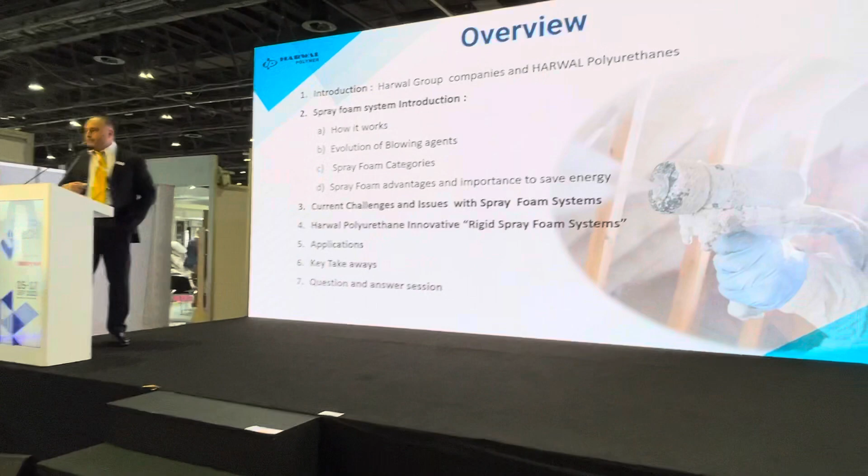Let's dive into our presentation. First, I want to give you a brief overview of the flow. We will start with the introduction, then go into spray foam, how it works, the different categories, advantages, disadvantages. I'm assuming some of you are not aware of how spray foam works, so I'm treating the audience as both knowledgeable and new to this.

Once I give you the overview, I'm going to talk about the challenges of spray foam. Even this morning I got phone calls about some challenges you are facing. Spray foam is a sensitive product, so we should be careful how we apply and use it.

Afterwards I'm going to talk about the spray foam systems that we currently have available, and we'll conclude with applications and takeaways, followed by the question session.

Just a brief introduction. Our division is part of the Harwal Group. We are a global company, not a local company, present all over the world. We are the biggest plastic converters in the GCC region, 200,000 tons. IP Harwal is one of the divisions, competing in both plastic and polyurethane.

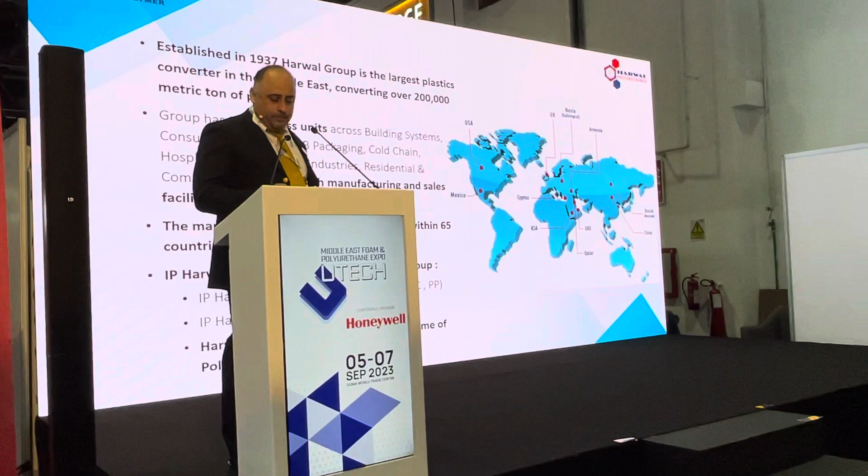Right now we are basically in the polyurethane division, and it's a worldwide division. It's one of the oldest companies in the group, and also in this part of the world. We have a diversified product range, and today we are going to talk about spray foam, which is part of the building products.

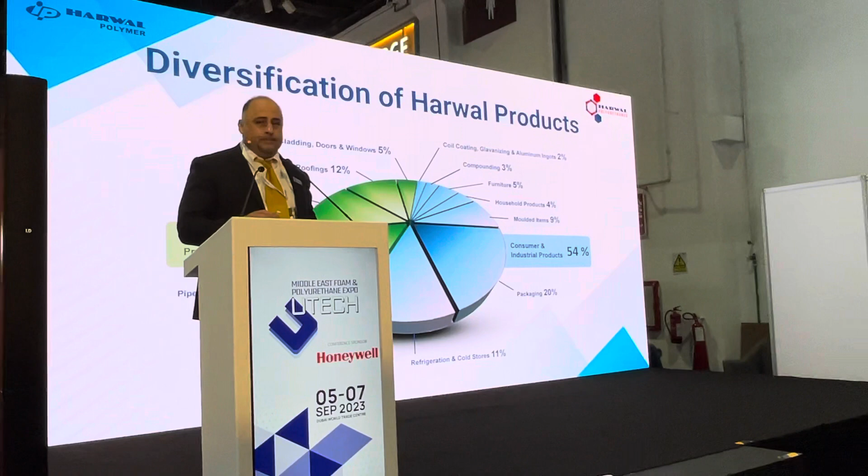Innovation is our culture, it's also in our DNA I would say. We have a group of people, day and night, thinking about how to innovate. Our chairman, Mr. Harwal, drives all these innovations from A to Z, and that's why we started working in polyurethane from 2012 onwards.

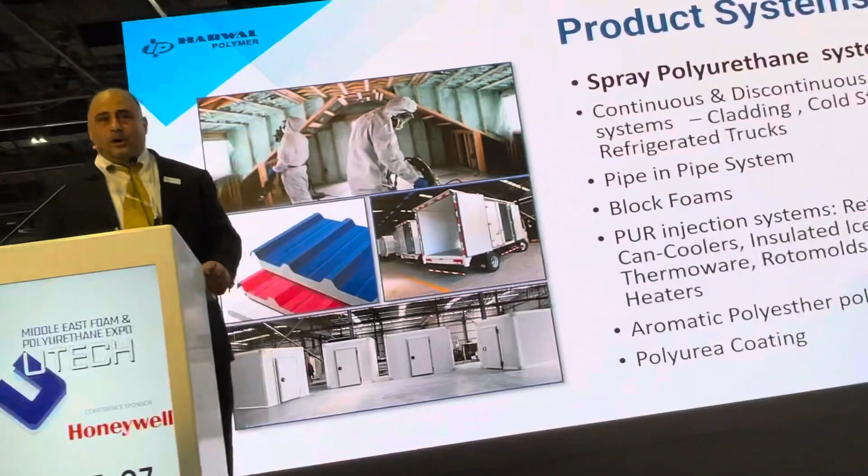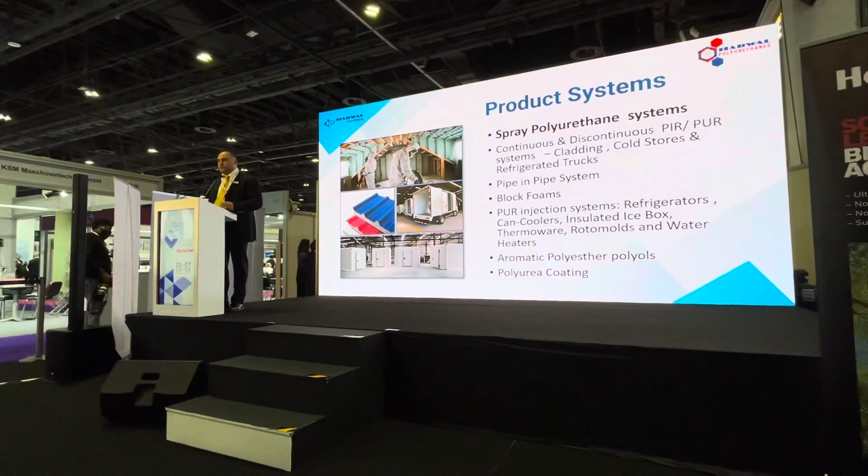Our product systems, as you see, cover a wide category. Today our focus is on spray foam. We cater to all other rigid foam applications - trucks, cold stores, continuous lamination - and spray foam is one of our good products that we are currently capturing in the market.

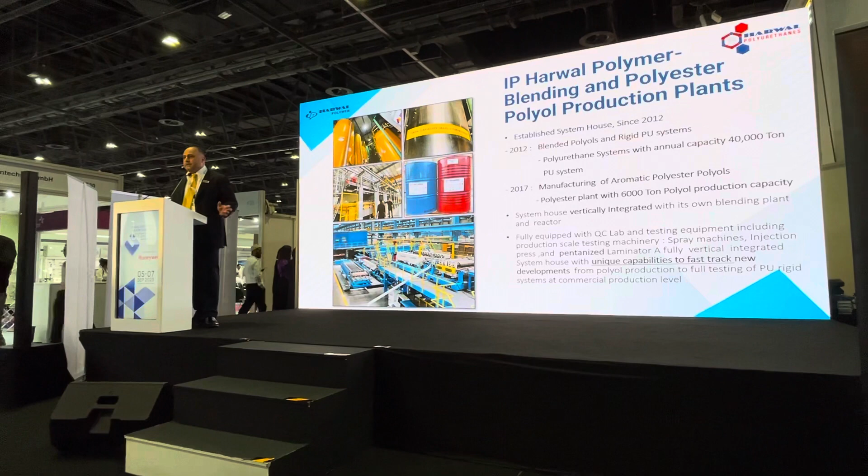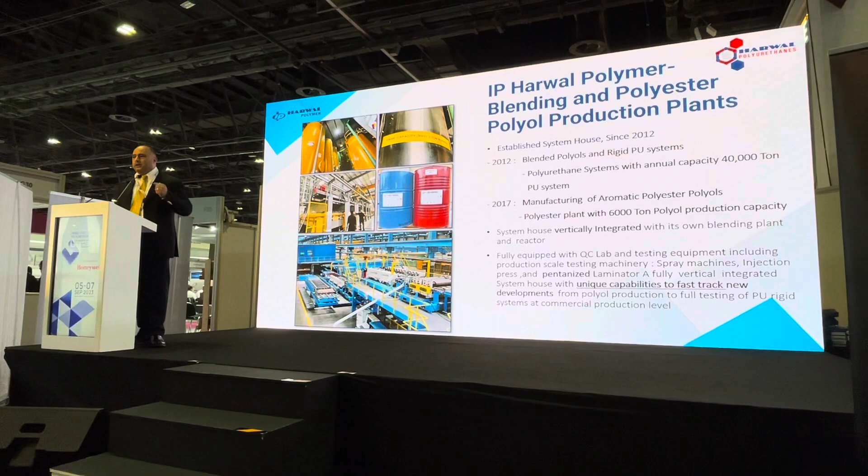This shows our capacities at our factory, located in Dubai Investment Park. One key feature is that whatever we develop, we immediately roll out and test in our own facility. We have our own laminators, presses, and machines, so we don't use our customers for our developments - we are our own customer before we give the product to outside customers.

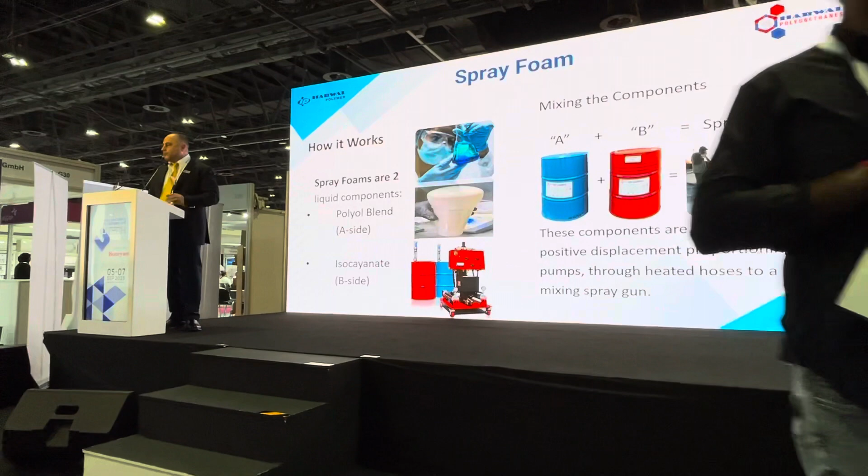So basically, what is spray foam? Spray foam is two components - the blended polyol and the MDI. You mix them together with a positive displacement pump machine, the spray machine, and then you spray it.

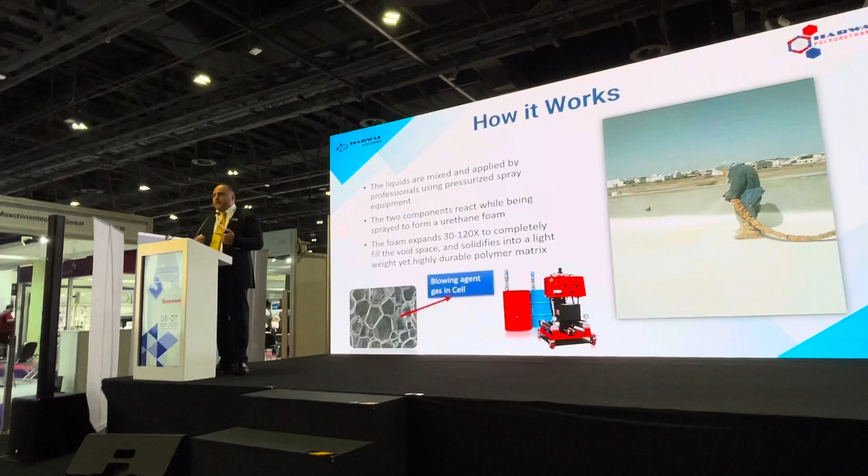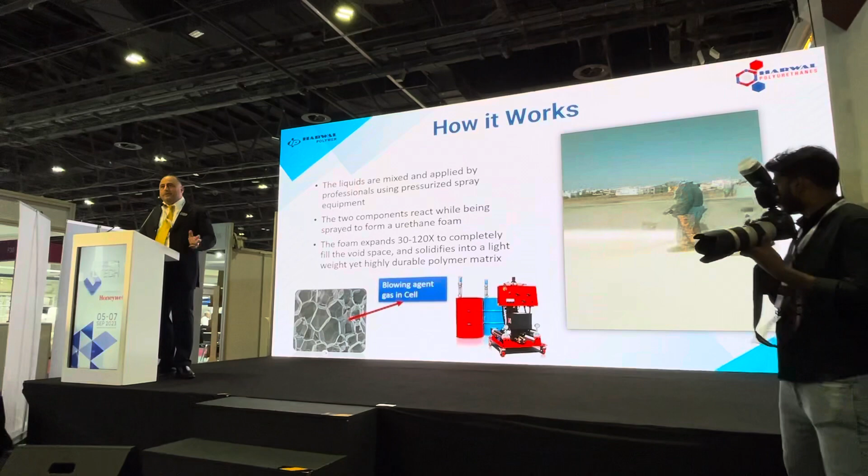How it works - the liquids come and react in the mixing head. I want to show you a video here from one of our sites in Ras Al Khaimah. This is our spray foam, taken in hot temperature about 2-3 weeks ago. We are basically spraying one of our customers' roofs.

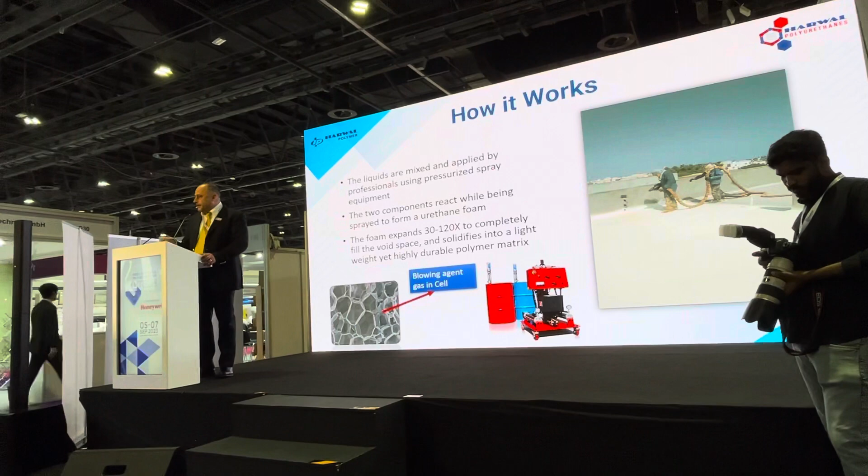Important is the blowing agent, which is the gas in the cell. This has a critical impact on the insulation value of our spray foam. Depending on the gas we are using, you will achieve different insulation values, which will come later in our presentation to see the impact on different spray foam systems.

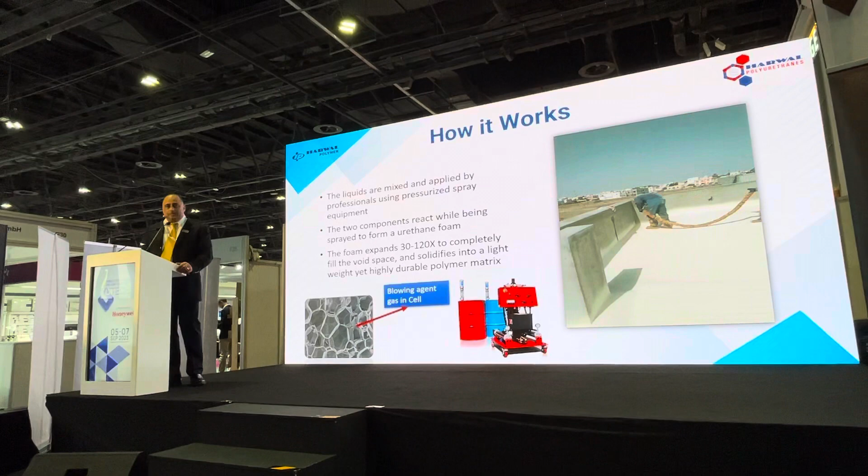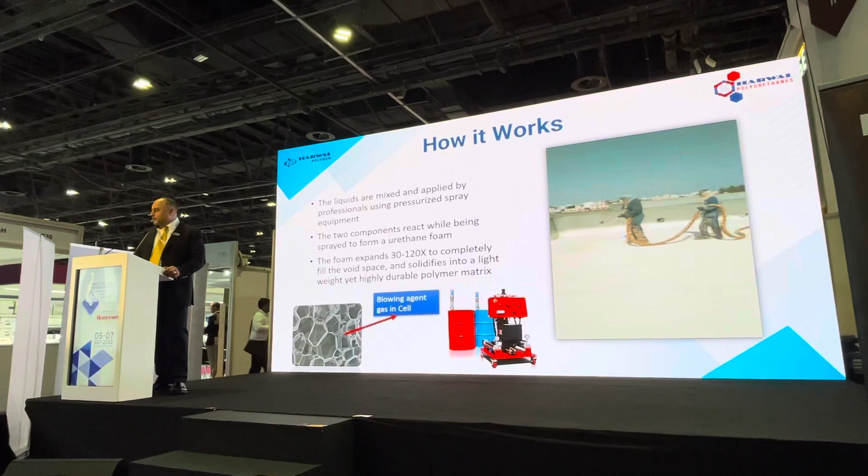As you see, the guys are doing some touch-ups on the corners in hot Dubai conditions of 40-45 degrees outside, and you can see a nice smooth surface, which is our premium product - spray rigid foams.

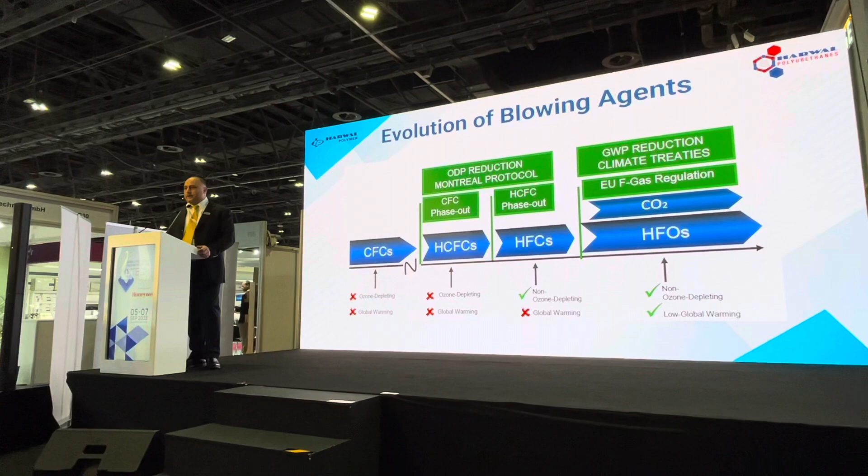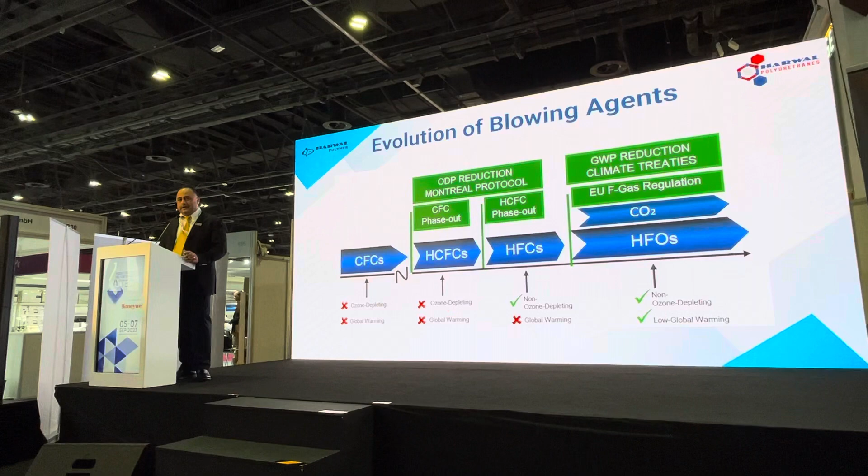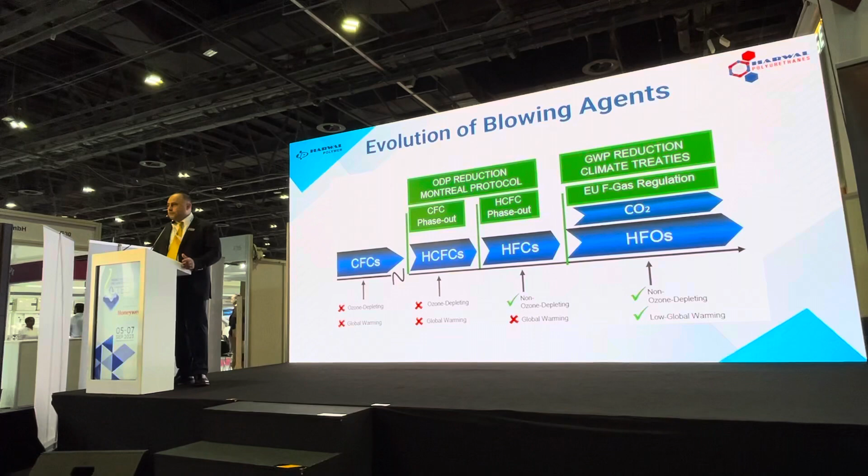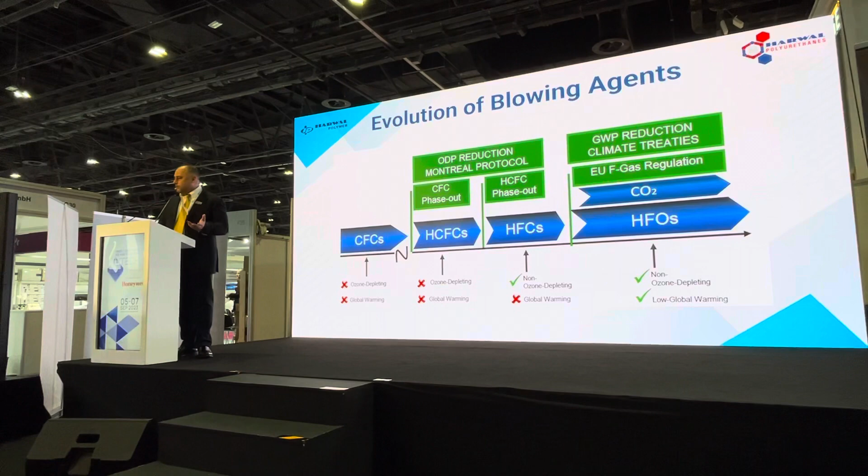As I mentioned about the gas that was important in spray insulation, it started with CFC, and it's going down from left to right. Right now we are phasing out HFCs, and now we're at the last stage where we have HFOs and CO2 coming from water. This is the latest stage of our evolution of using blowing agents in spray foam, and each one has distinct criteria. At the far end of the graph, it is ozone friendly and has low global warming potential. This is what we are striving for.

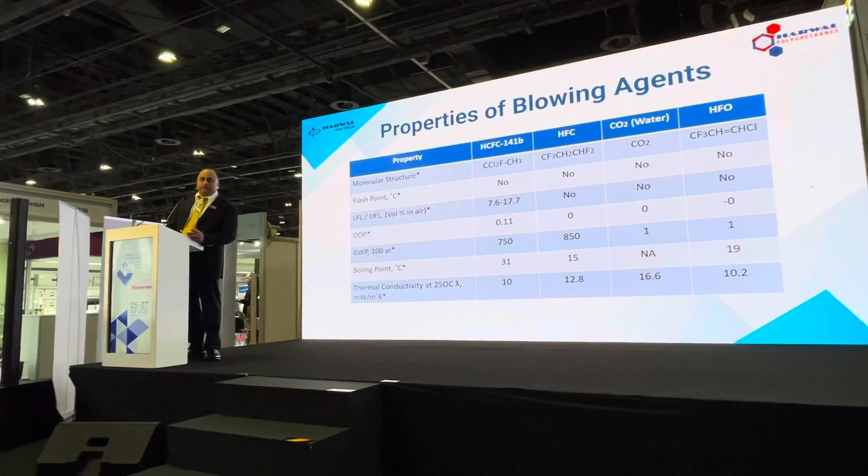The properties of the blowing agents - what's important here is the boiling point. If you go from left to right, the HFOs have a low boiling point, 19 degrees. The 141b system has a 31 degree boiling point. This is a challenge sometimes when we're applying spray foam in this part of the region, where temperatures can soar all the way to 50 degrees. So one point is the boiling point.

The second point is thermal insulation. As you see, the water-blown system has a lambda of 16.6, which is the highest, which works against what we want. We want low insulation lambda, but when we go to water, that's where we get penalized on the insulation value.

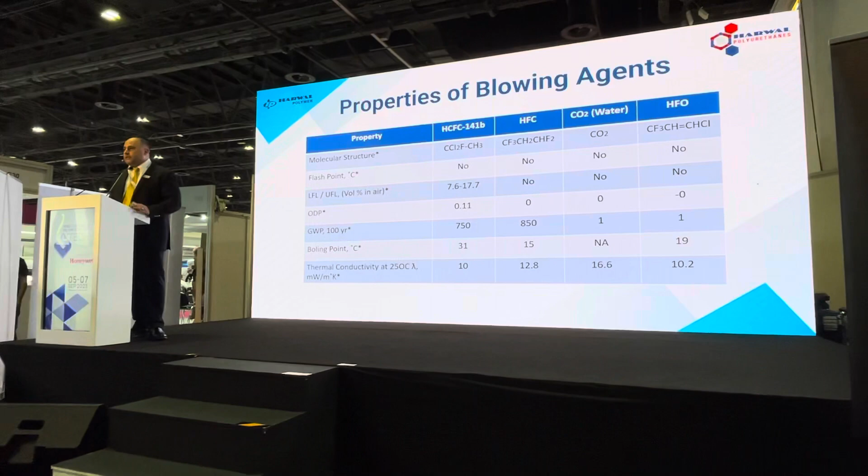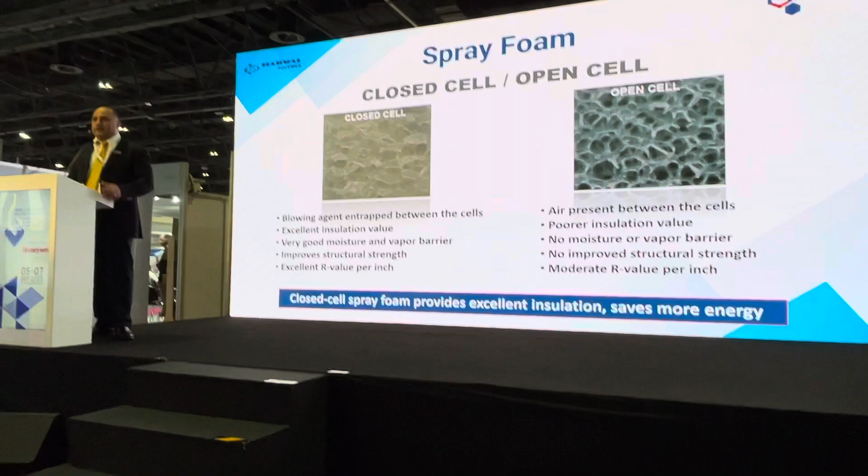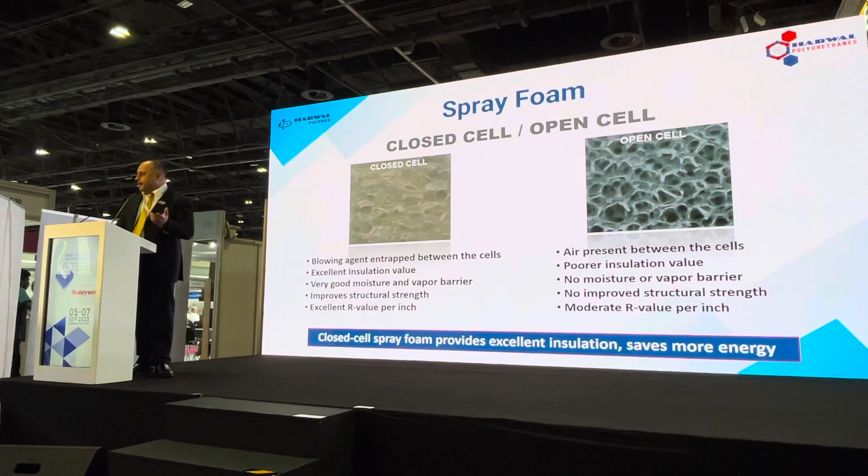We have two categories of spray foam: closed cell and open cell. An example to keep in mind: one is gold and one is silver. Silver is the brother of gold, but silver is much cheaper. The gold is the closed cell because it is strong, it's closed cell, it has a very good thermal barrier, structural strength, and the insulation value is much better than open cell. The open cell has similar properties but is weaker, though it has some distinct applications where we can use it.

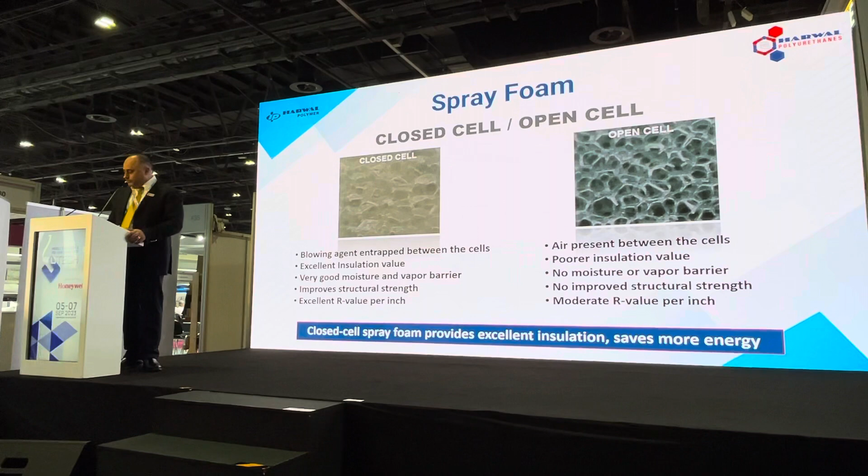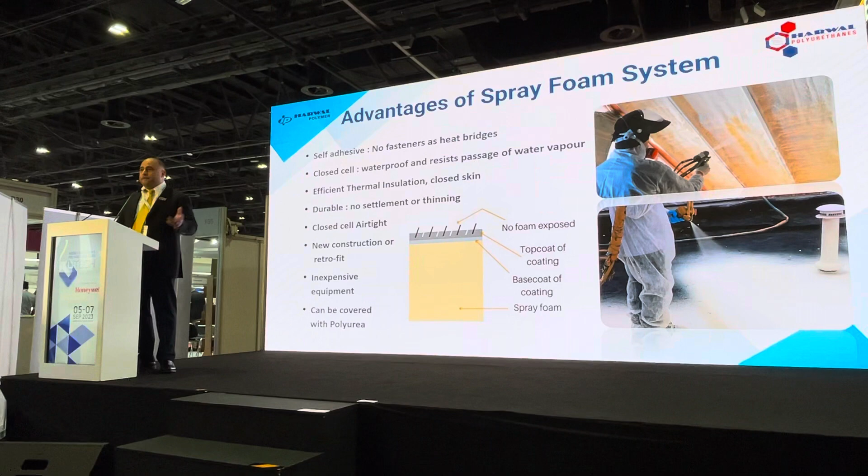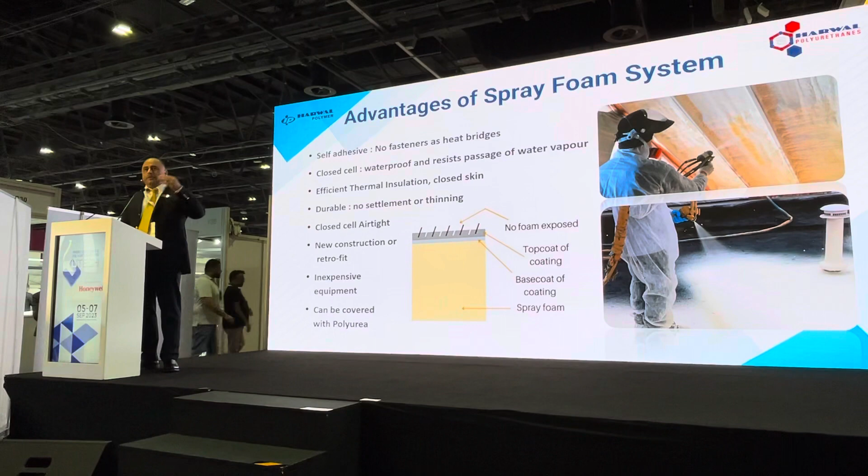What are the advantages? There are a lot of advantages. You don't need to apply glue on the wall to apply your spray foam - you just spray it, boom, it glues on. It prevents moisture penetration, it's a good insulation value, and it reduces the load inside your office or room. If you're properly insulated, you don't need to put a lot of AC, so your AC costs go down. You can multi-layer it, apply polyurea over it, put protective coating over it, and it can act as a permanent insulation barrier. So it has a lot of good advantages.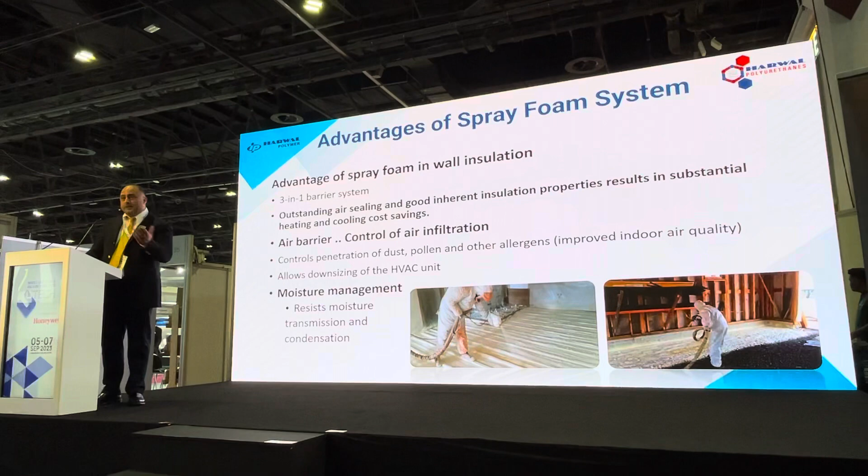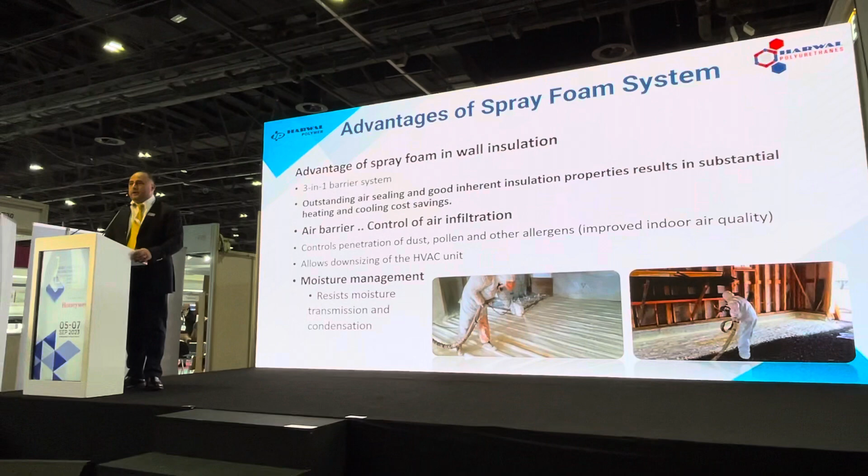It's an air barrier, it prevents moisture penetration, and it seals the whole area 100%. This is very important, especially in North America, where power is very expensive, so everybody is trying to reduce their energy costs - not like here, but elsewhere it's very critical.

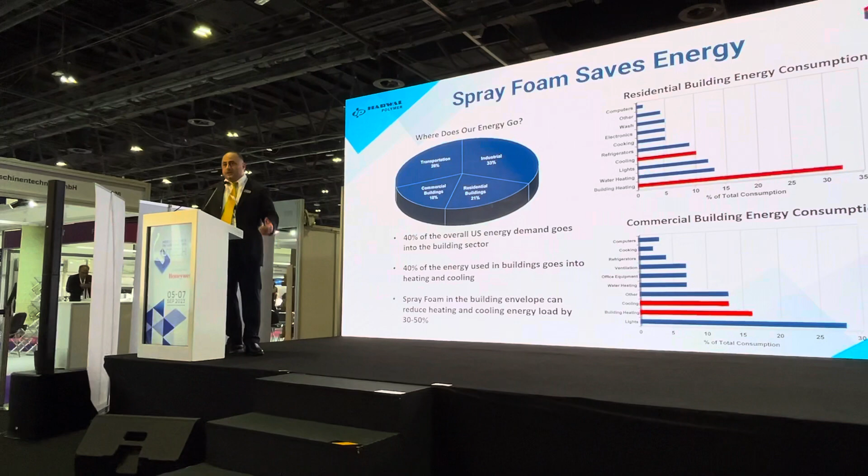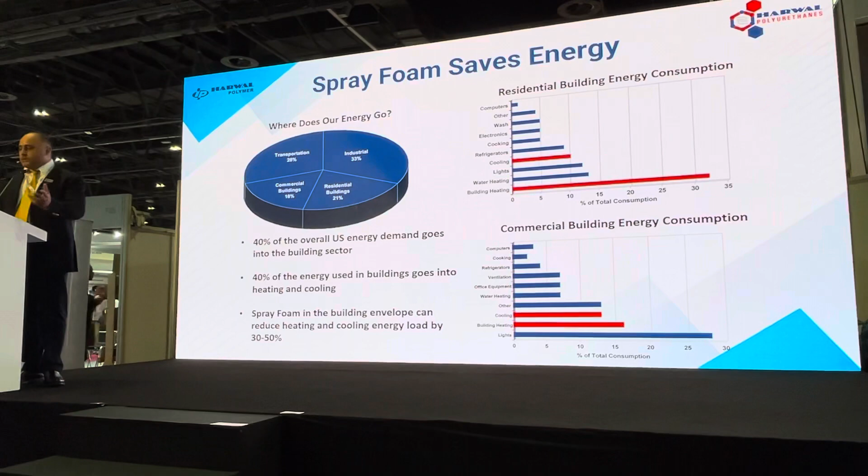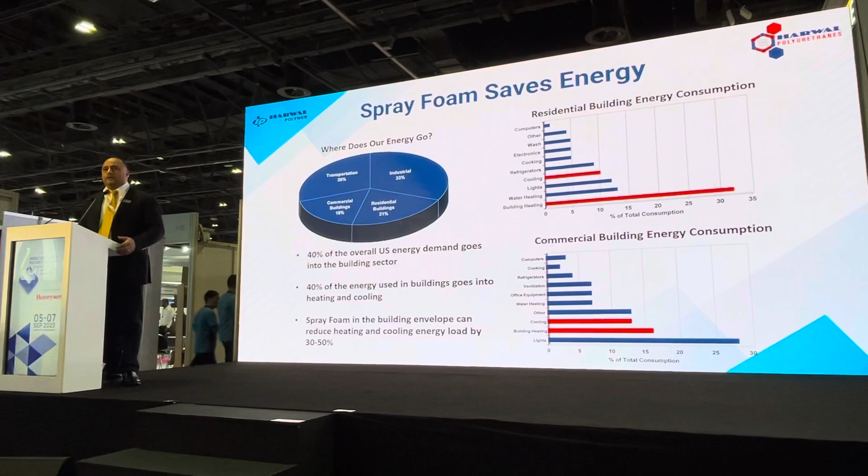Spray foam saves energy, as I mentioned. In the US, the biggest consumption of energy is wasted in heating commercial and residential buildings. This also similarly applies for Dubai, but instead of heating, we just put cooling, because we're running the ACs almost 24 hours. So if you're saving almost 40% of the energy in the US that's spent on heating and cooling, if we do proper insulation of our buildings and houses, we can reduce the cost of energy by 30 to 50%. This shows that spray foam is a very critical element that can be used to save energy.

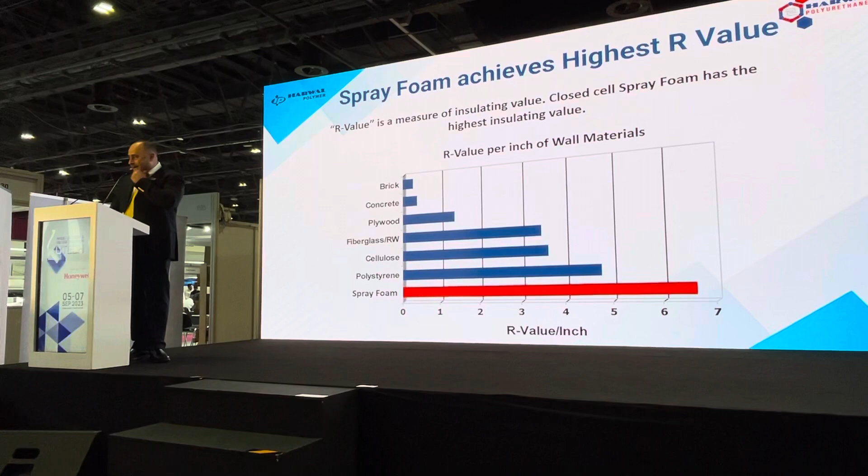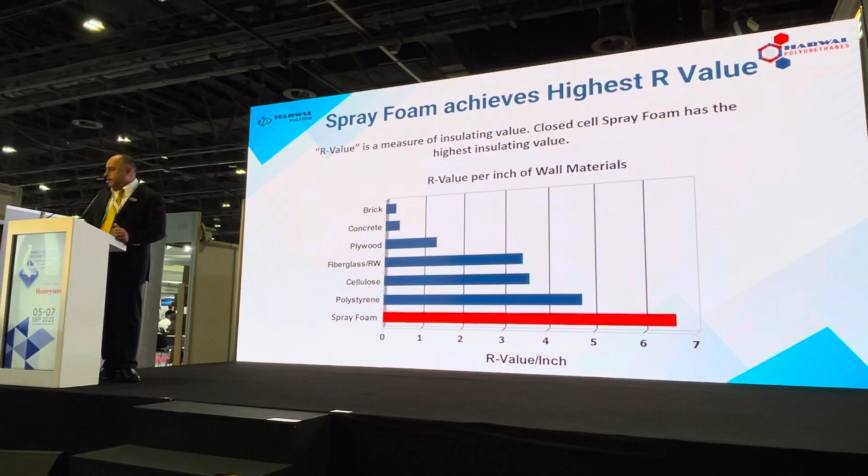If you compare all the different categories of insulation, spray foam and rigid foam are the best forms of insulation, as you can see in the bottom graph. It surpasses all the other sorts of insulation.

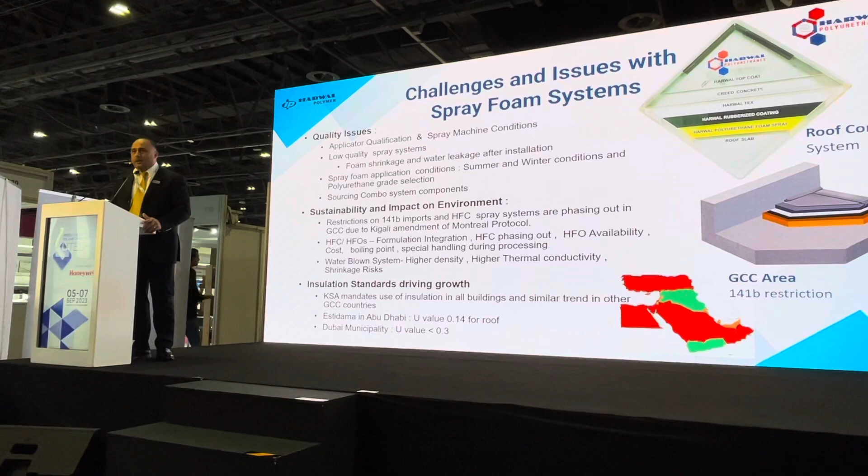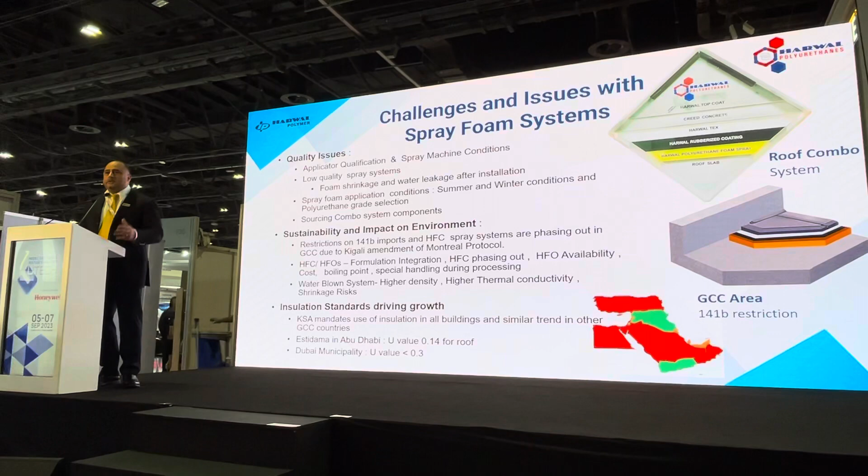So what are the challenges we are facing with spray foam? Quality issues - the applicator could be using the wrong machine, not properly calibrated, not qualified, maybe tampering with the chemical. The conditions - summer is 50 degrees, winter is 20 or 15 here, wind is blowing - there are many variables that can affect your spray foam when applying it. Also there is sustainability and impact on the environment.

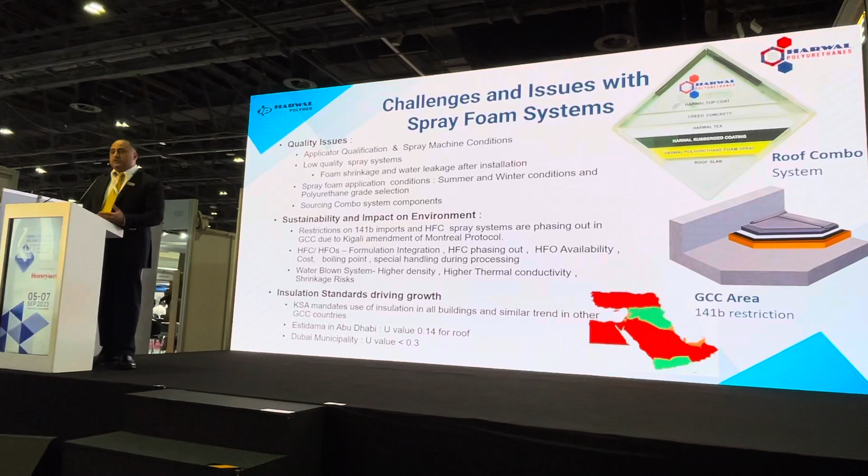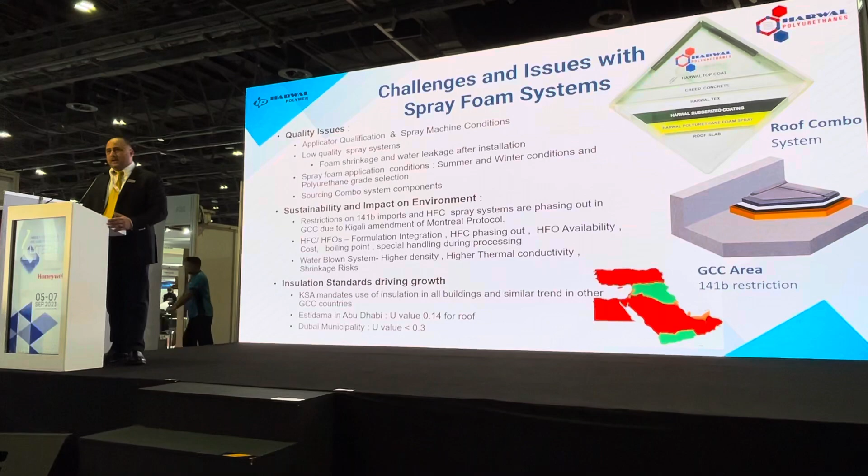Right now, as you guys know, 141b is phasing out. So we are pushed more and more to use alternative blowing agents, and those also have their challenges - they have to be fully developed on a commercial level similar to 141b performance. In certain areas there are still gaps everybody is trying to close, but these are the challenges we are facing, along with availability of those alternate blowing agents and their price.

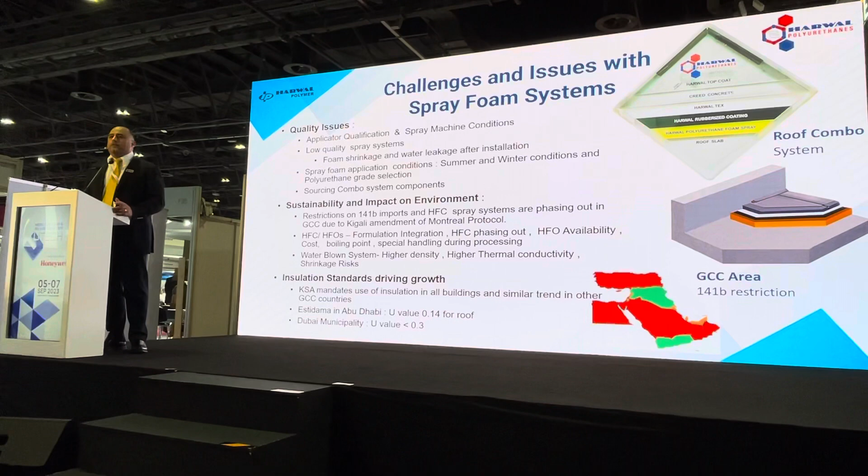We're also having pressure from local regulations to reduce 141b usage. For example, next year will be our last year where we can import 141b - after 2024 we cannot import it. So what is our plan? That's why we're working on new alternative developments to make sure that once 141b phases out, our customers can trust that they can continue using our new systems.

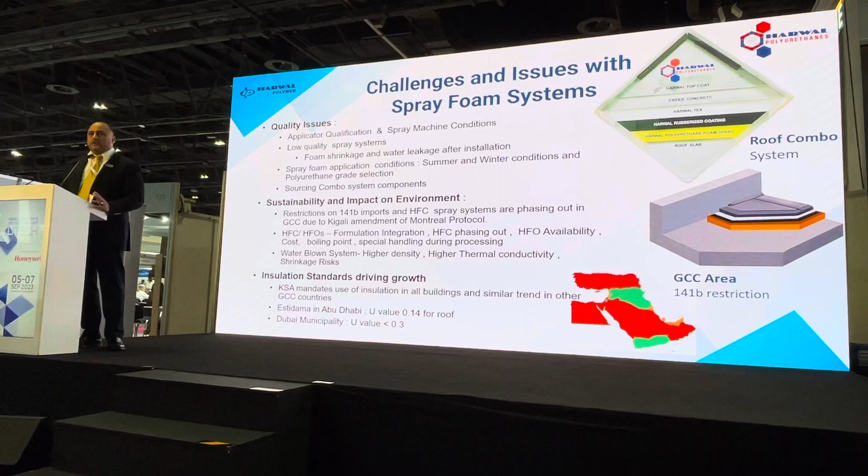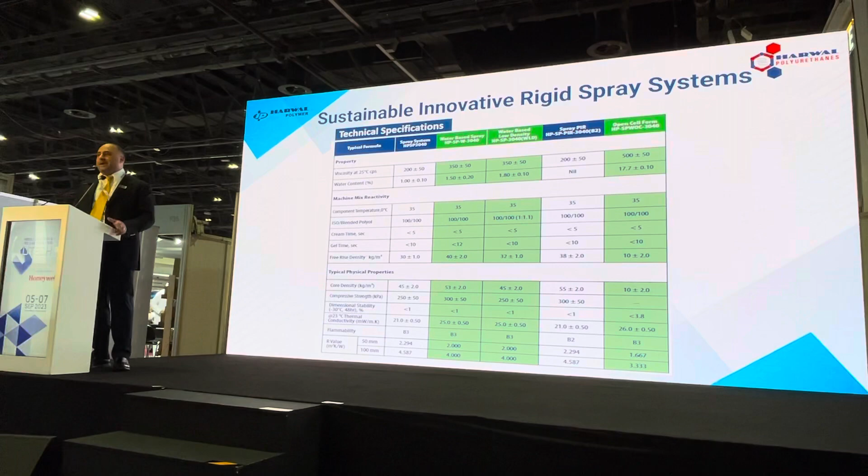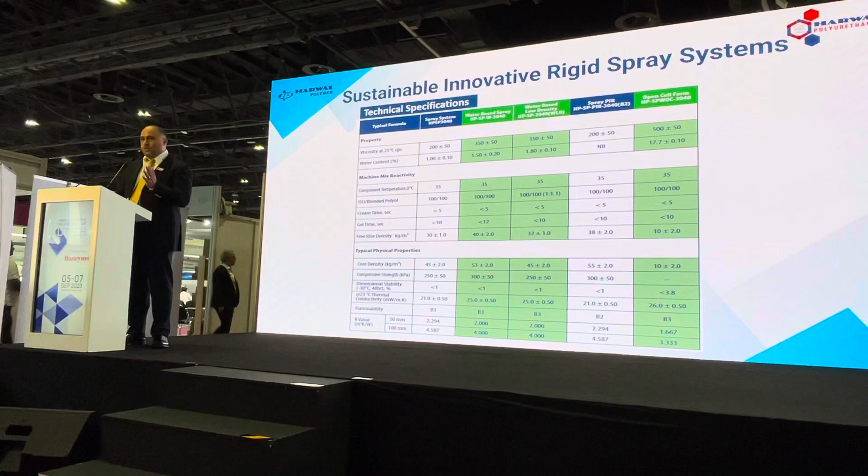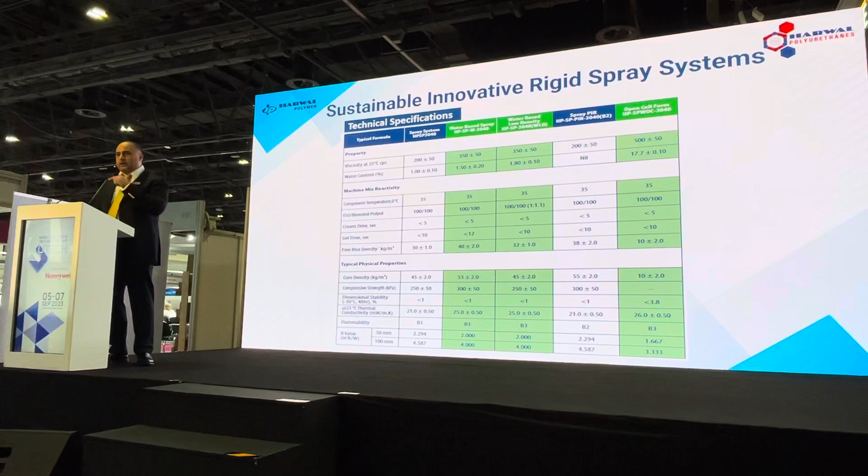Now we come to the core of the discussion. These are the systems commercially available for spray foam right now. From left to right, we have the 141b system, then a water-blown high density system, then water-blown low density. We have a PIR spray foam - if people have specific applications where fire resistance is required, we have the PIR spray foam. And then we have the open cell foam. If you look at this table, you'll notice each one has different characteristics, which I'll show in a summary on the next slide. For example, the open cell has the weakest insulation on the whole chart.

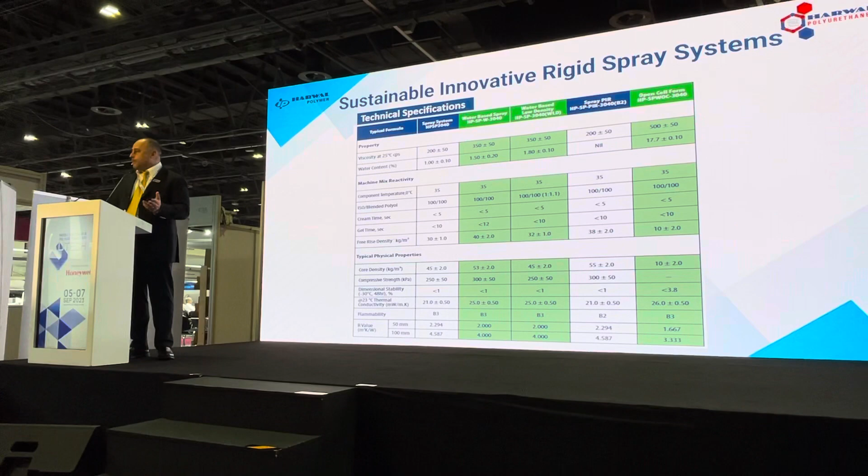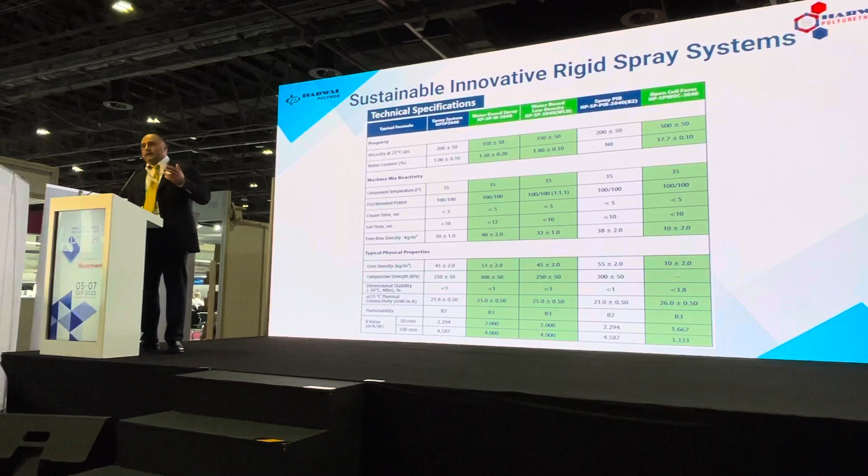Compression-wise, it's also the weakest. The PIR, for example, ranks very good on all the areas, but the price is a little bit more. So each one has positives and negatives. It depends on what you want, what is your application, and what are the specifications.

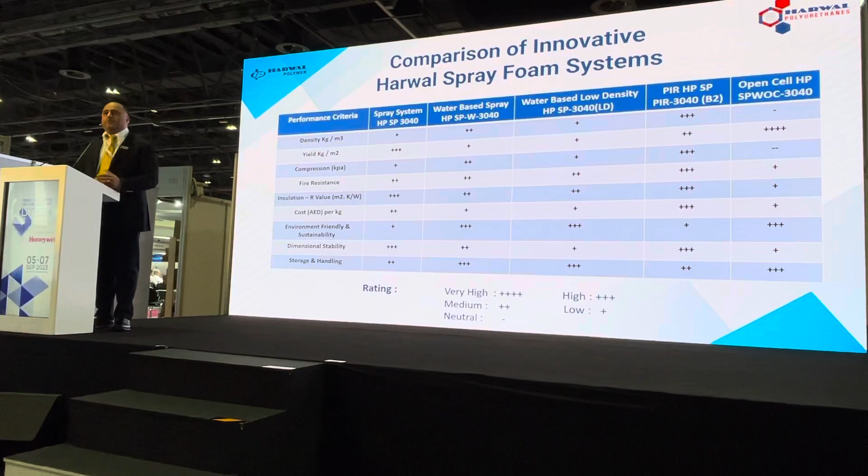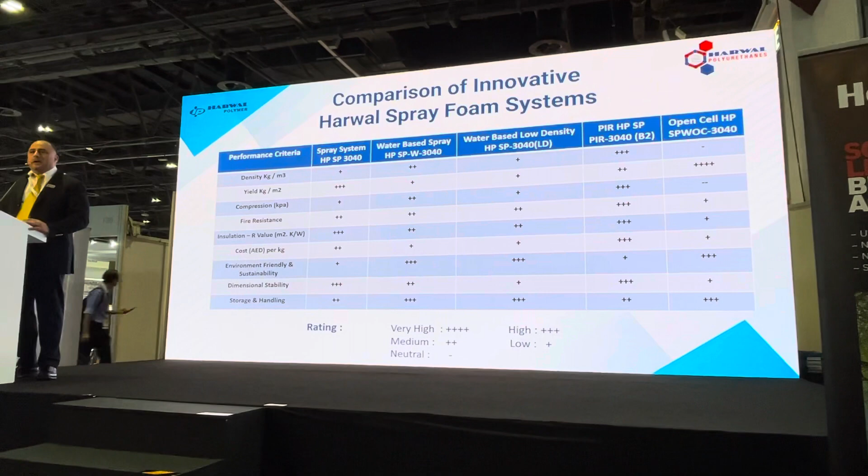So if I compare all these spray foams that we have, as I mentioned, each one has a distinct identity. What I rated was, when I'm putting the pluses highest, it means that in that category it has the highest ranking. So if you are looking for an application where you want high density and you don't care about the insulation...

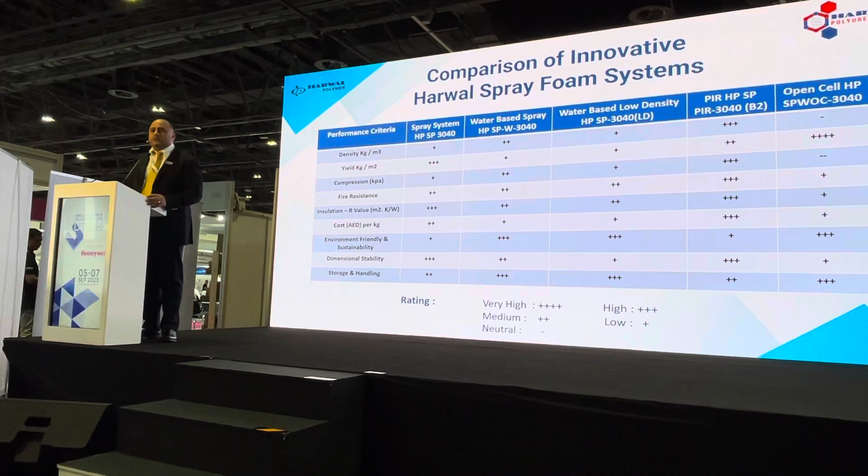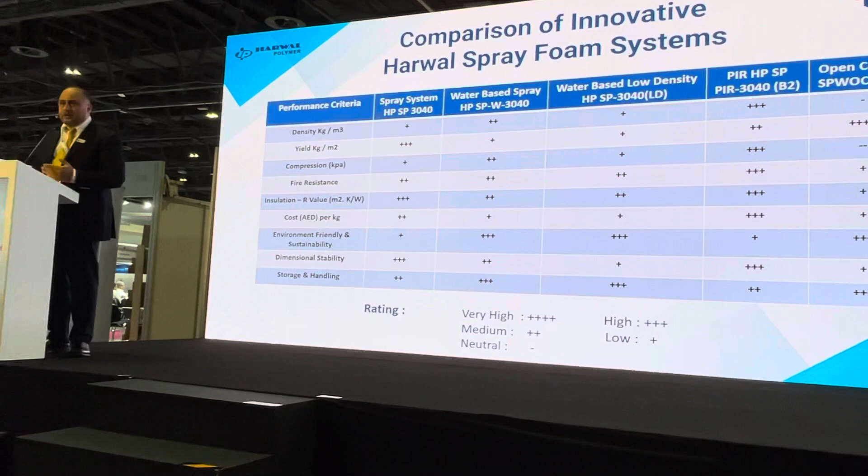...then water-blown high density 3040W will be a good product that you can use. If you don't care about the strength and the insulation, and just want the opening, then open cell will be the best, because in open cell the density is the lowest, so you can get the highest yield on the input that you are putting.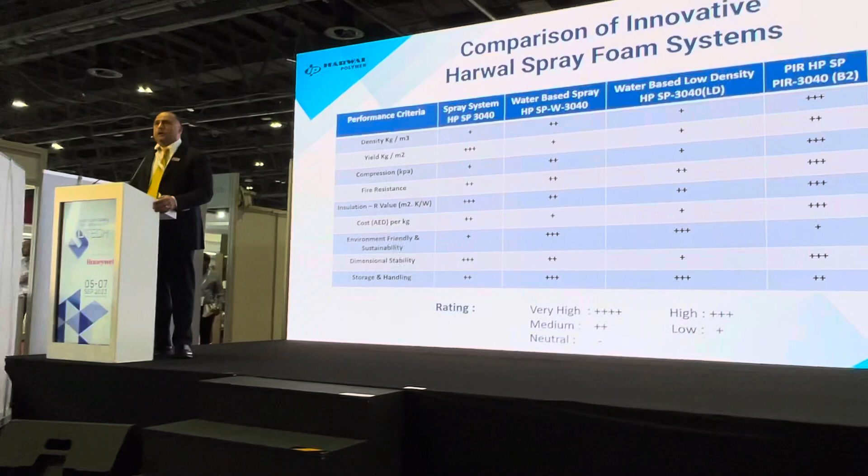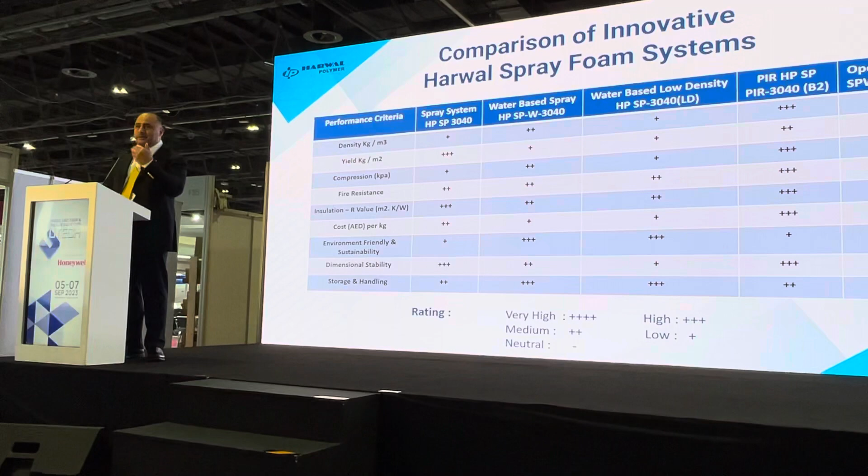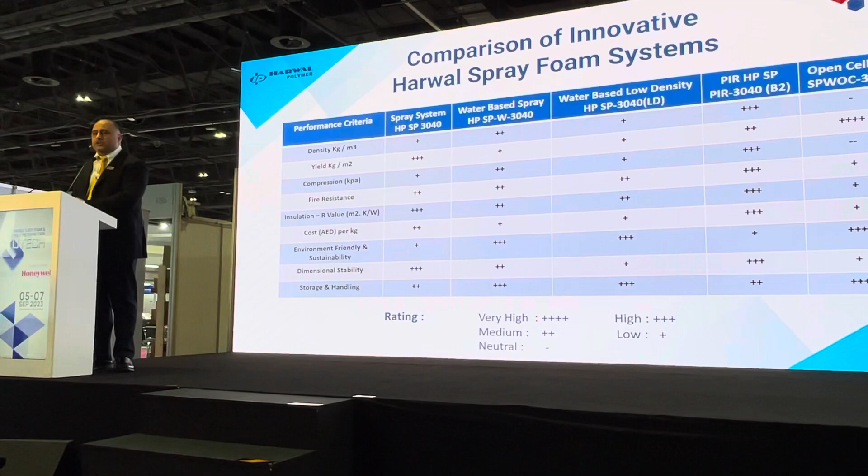If you are looking for a robust system where quality is important, insulation is important, then at this point I would say the 141B system is the best, but it has an impact on the ozone environment requirements. So it all depends on the application and what your customer requirements are, the specifications. According to that, we can cater the spray foam for you.

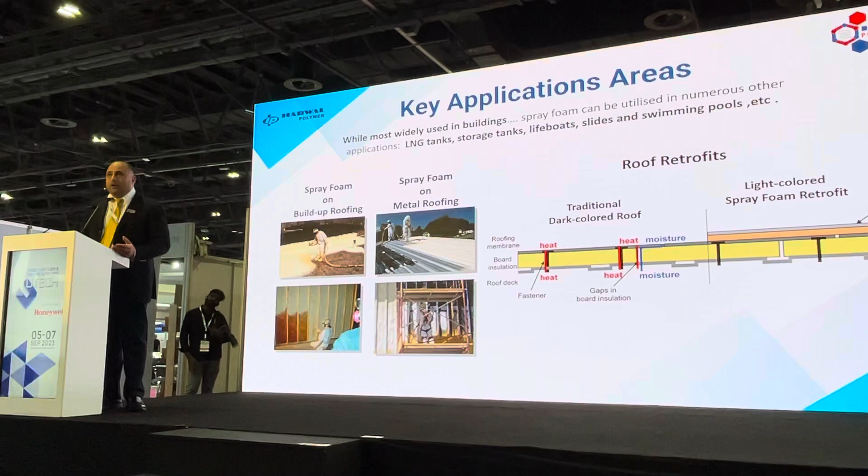What are the applications? Mainly in this part of the world, it's been used for insulation of roofs in villas or existing structures where there is a leakage, for example. When it rains in Dubai, you can see how much water is coming and leaking on the roofs. So on the right, I put an example where you can retrofit your roof.

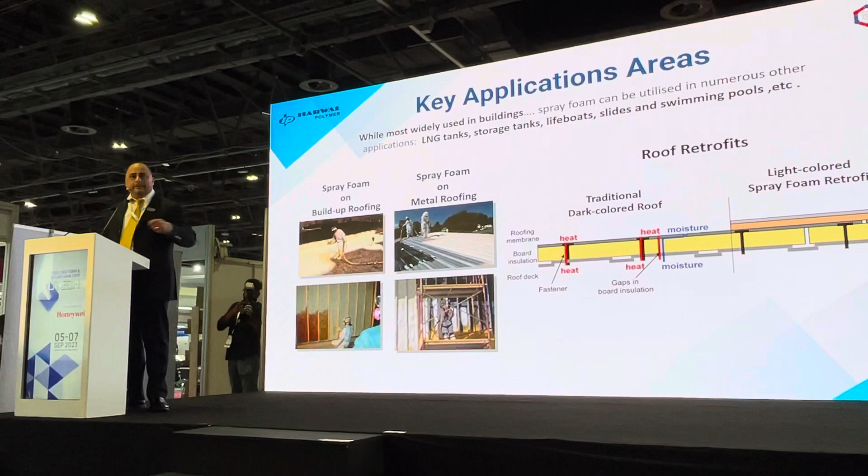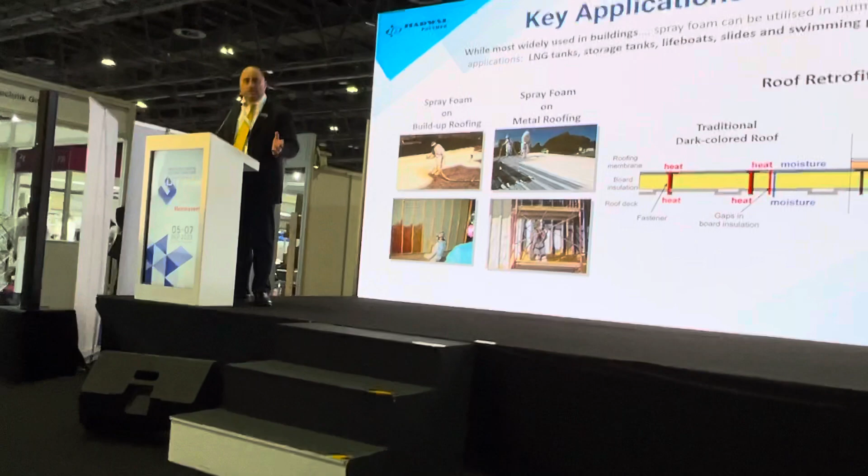All you have to do is go on the roof, clean it, spray, maybe apply another coating, and boom - first you increase the insulation of your roof, so it becomes an even better roof, and you stop all the leakage, all the water leakage stops, and you also stop the heat transfer where there are heat bridges. So it has a lot of applications.

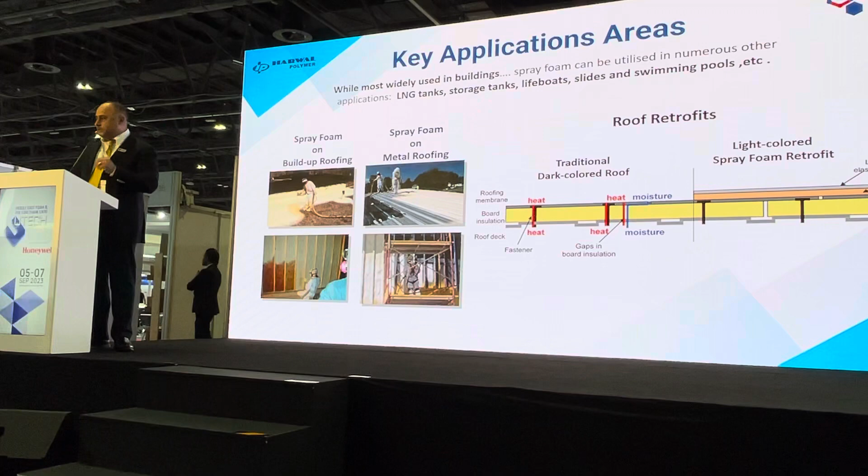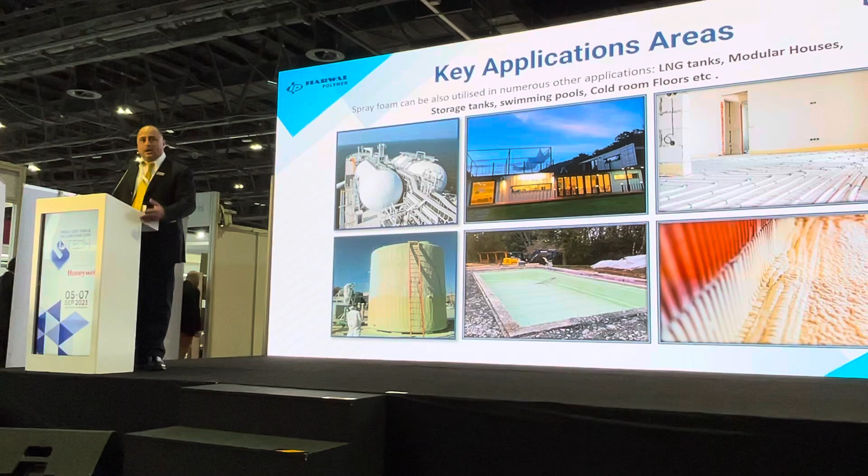In this part of the world, mainly it's for villas and houses, and also, like all over the world, you have LNG tanks, swimming pools, cold stores. If you have a cold store, for example, which requires minus 20 to minus 40 degree application, instead of putting slabs of foam, you can spray, which gives you a nice seamless insulation. So you can see it has a variety of applications, also for prefabricated houses.

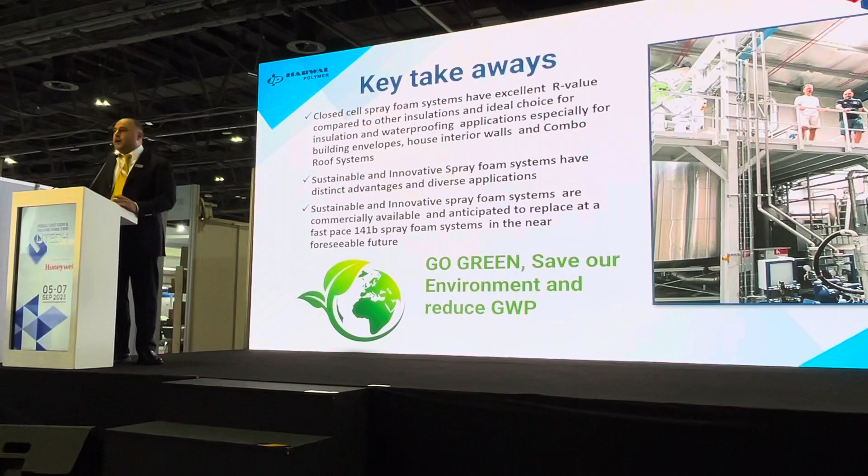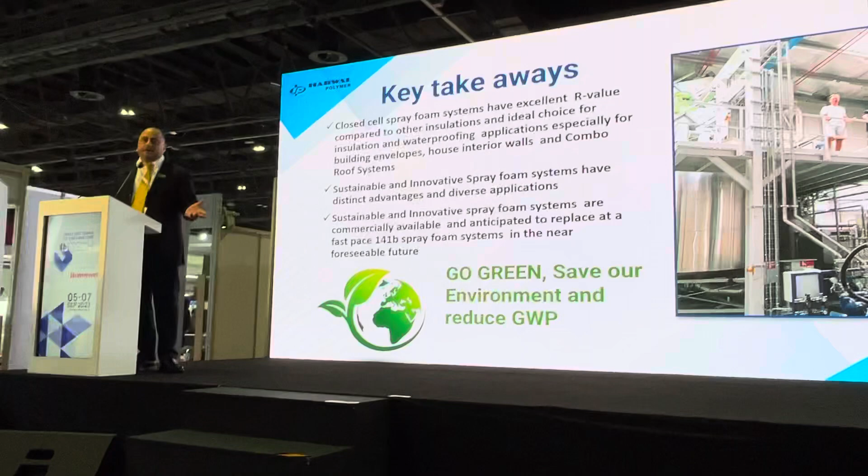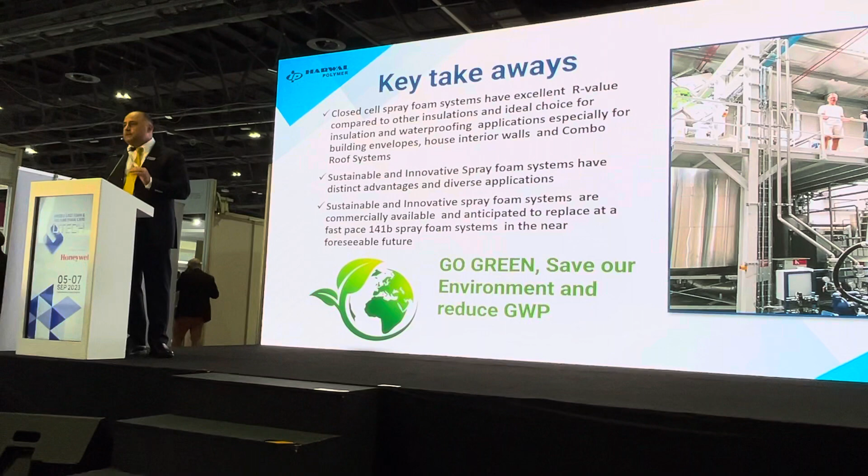What are the key takeaways? The first one is that spray foam is established as having a very good R value, insulation value - that's a given. Second, we have diversified applications and systems for different applications. Each one has its advantages and disadvantages; none of them is the best on all rankings. One is high density, the other is high cost, one is low insulation. It will depend on the application, and then you select the system that matches your requirement.

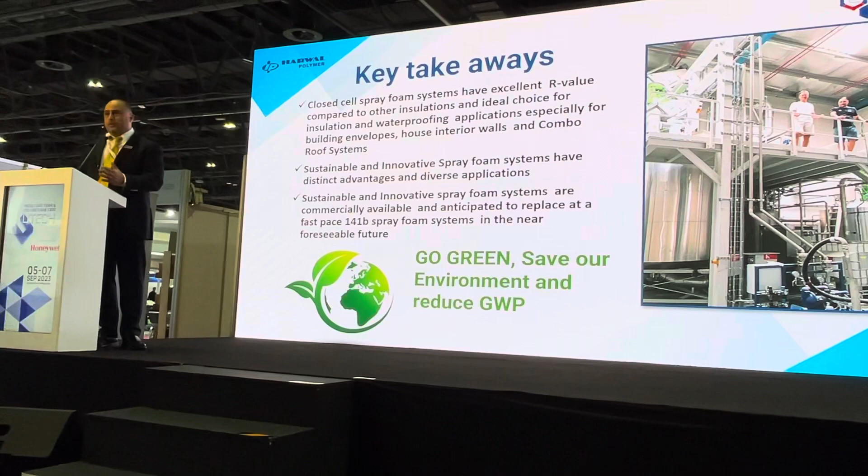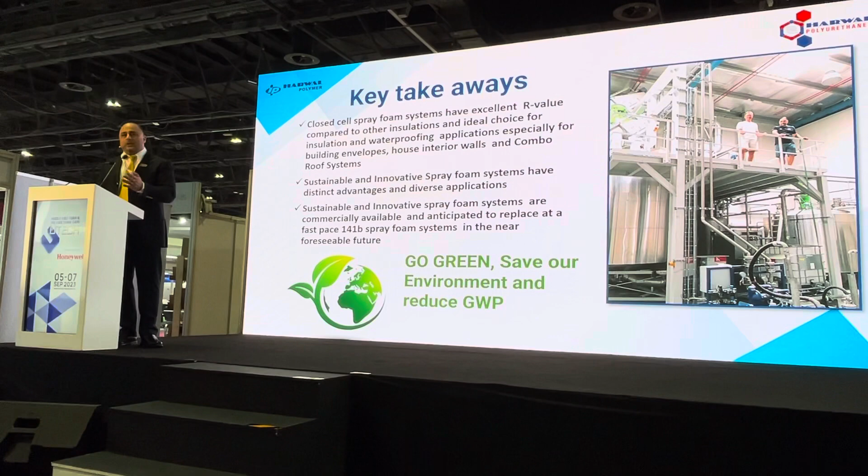But the 141B system, as of now, I would say is the most robust system. We are still selling a lot of them, but we have customers who are also requesting a green system. That's why we are also giving the water-blown system.

And that's the end of the presentation.

So now I'm going to ask some questions. The first question will be: out of the 4 systems that we have - the 141B, the PIR, the water-blown, and the open cell - which one has the highest lambda, meaning which one has the worst insulation? Open cell. Let's give a giveaway to our friend here from Momentum.